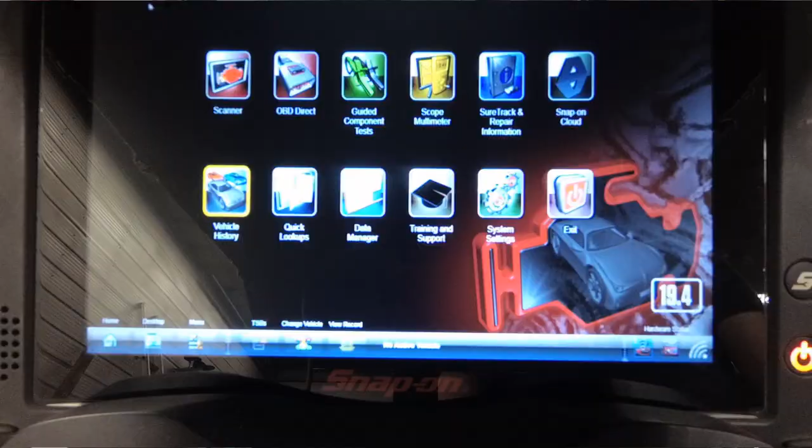So this is a new vehicle record. I've never scanned this before. Snap-on scanner automatically ID'd it already. And we'll start out with a network scan of the vehicle and see if there's any codes that will point us in a direction of some sort with regards to this backup camera. I'm not sure how long this network scan is going to take. There's the progress bar. That's fairly quick. Probably about 60 seconds. I'll pick up when we're at the end.

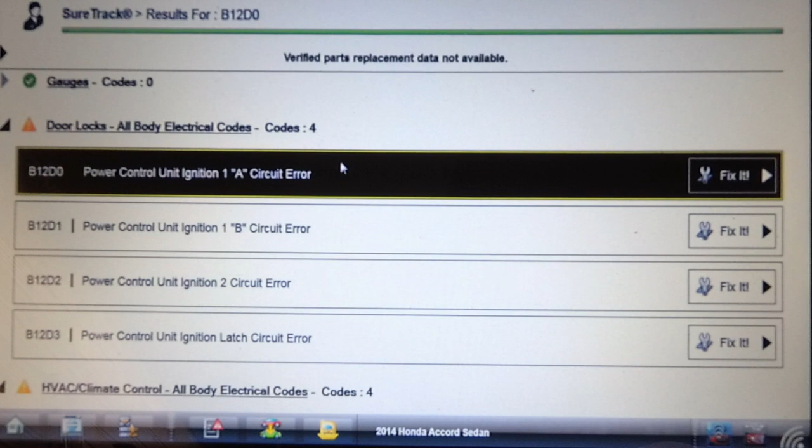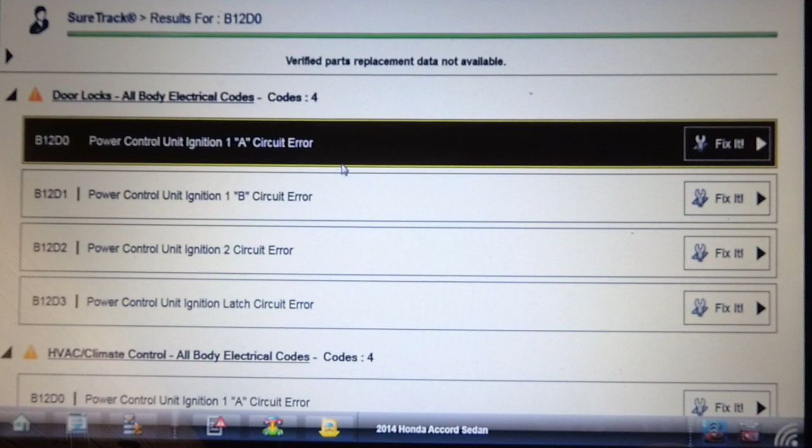So, it took about a minute and a half, almost 2 minutes to scan 20 controllers. And for the most part we don't have any codes except for these codes in the door lock system in the body, and I don't think they have anything to do with this backup camera. I'm not sure what those codes are generated by. It's interesting, they're in the body and they're in the HVAC. Probably all the same control codes.

Yeah. I'm going to try clearing all these codes out and see if that restores the operation again. Looks like this is divided up in several body controllers, but it's all the same controller. So I've got an electronic record of this already, so I'm going to just go in and clear all codes read by code scan and just see if that returns the operation of the backup camera. I would highly doubt it, but you never know. This seems fairly slow. Well, I'll pick up when we get to the end of this.

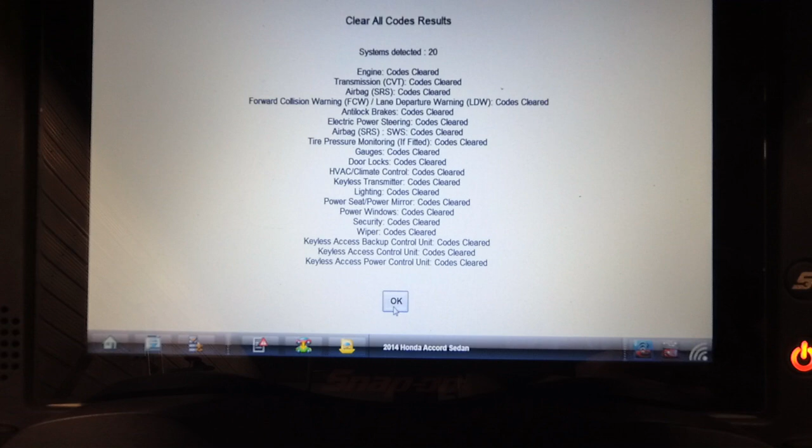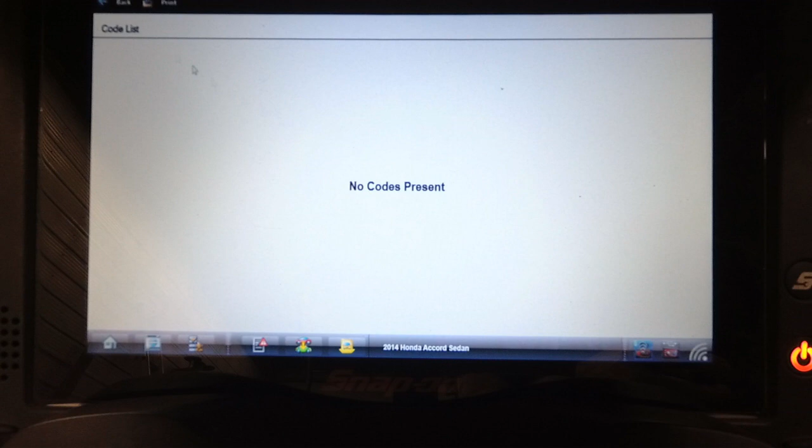So that took a couple minutes to actually go through a network code clear. And we're going to go and see if this has restored the operation of the camera. I just want to go into the door lock system and see if the codes had come back at all. All body electrical codes. Let's try that. So they haven't come back. So let's go and see if there's any change to the operation of the backup camera.

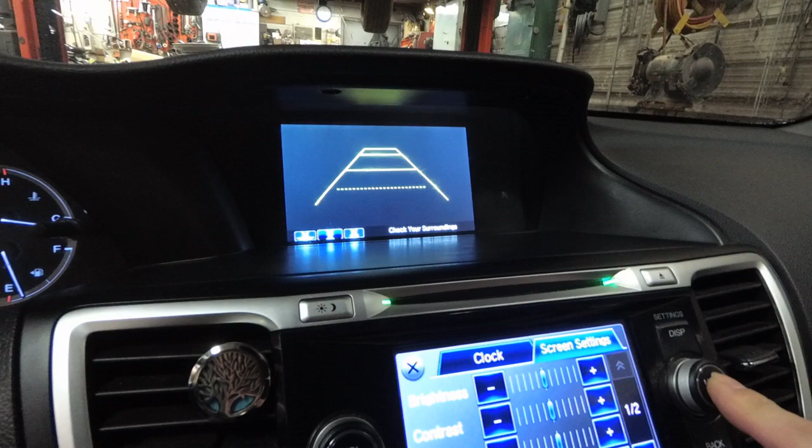I wonder where you hit OK. Oh, I guess you don't have to. Well, that didn't make any difference. I wonder why it says change view. Check your surroundings. Okay, so that didn't seem to make any difference. So those codes are secondary. We'll see if there's any TSBs on this. So it appears when the camera is up, you can use this menu button here to change the view. You can brighten it by turning this up and down, and you can change different camera views. That'd be nice once it works. So again, we're going to check for TSBs and see if there's anything.

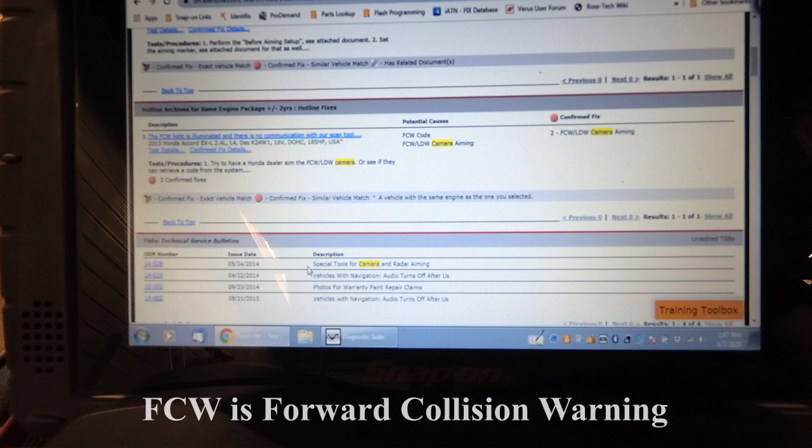So I'm on Identifix and I'm looking for technical service bulletins and case histories, and other than a lane watch camera and forward FCW, I'm not sure what camera that is, lane departure warning camera, that's not what we're working on. We're working on the rear view camera. No TSBs specifically related to this. Special tools for camera, vehicles with nav, audio turns off. I did find a picture of the camera and the connector view.

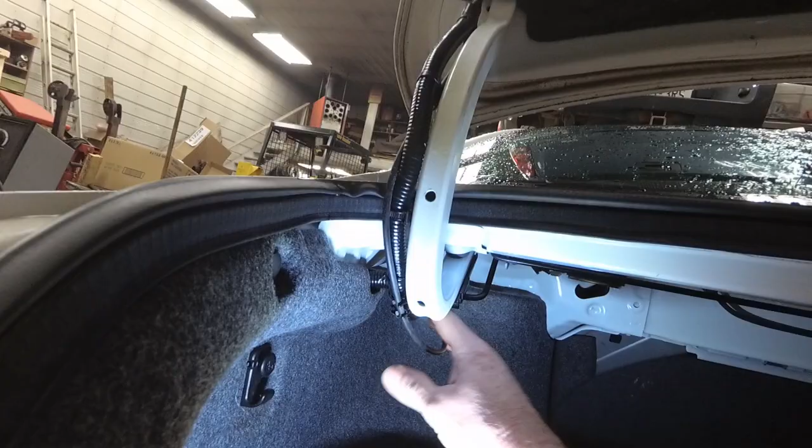Let's have a look at where this camera is on this vehicle. So here's the camera located just above the license plate, and I just noticed the license plate sticker has expired. They probably didn't realize that. One thing that makes me worried here is the fact that because it's on the trunk lid, every time you open and close the trunk, this wiring harness here has to bend. And if I look carefully here, it looks like somebody's been in here and taped up this wiring harness. So I wonder if there's some compromised wires. Any harness that flexes every time you open and close a door or trunk or hatch is always highly suspicious. So we'll look at that area and see if there's anything wrong in there.

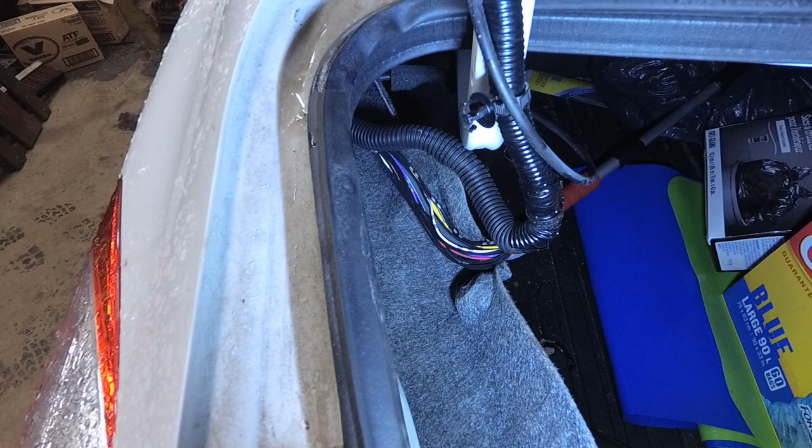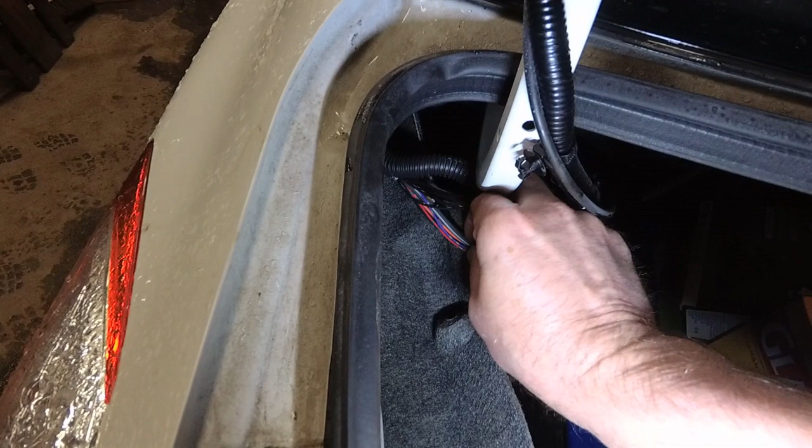So, no joy. I opened the harness. There is a tremendous amount of wires in here, but I found no broken wires where the harness had been taped up. I suspect that the dealership techs were thinking the same thing I was, being as how this is intermittent. There is one cable in here that I think is the video cable. It's quite large. I'm going to turn the key on, put this thing in reverse, and wiggle the wires back here and see if I notice anything happening on the dash. So I've got the key on, engine not running obviously. Gear shift in reverse. I'm going to go move the wiring back there and see if that camera comes on.

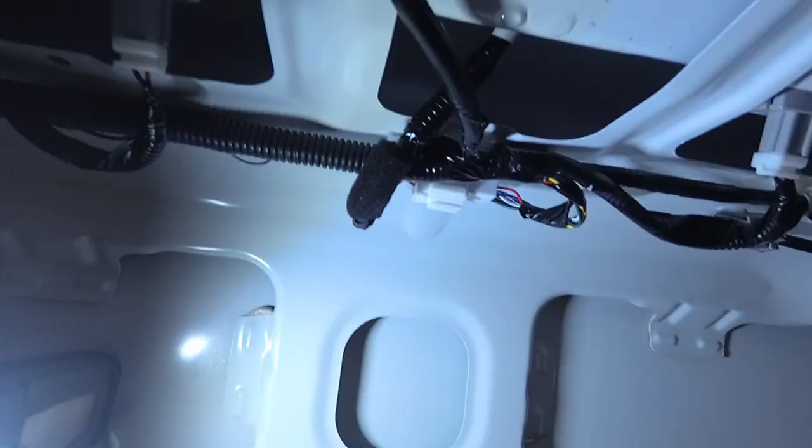Well, that seemed to make no difference. I tried tapping on the camera and that didn't work. So we're going to find that connector at the camera and test some wiring into the camera itself. So here's the connector behind the hush panel on the inside of the trunk lid that goes to the camera, and the camera is right up in here.

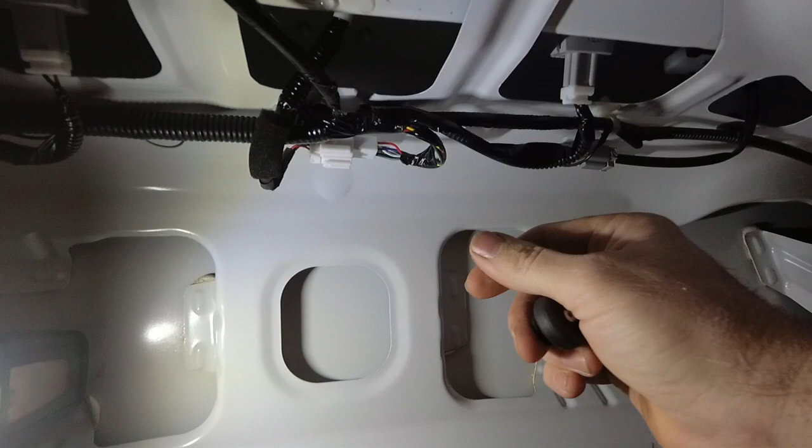Everything looks clean and tight there. I wiggled those connections. That's a picture of the connector and the pinouts. There's 8 wires to what appears to be that camera. Why so many wires, I don't know, but we'll figure it out. So we'll do some tests on this connector.

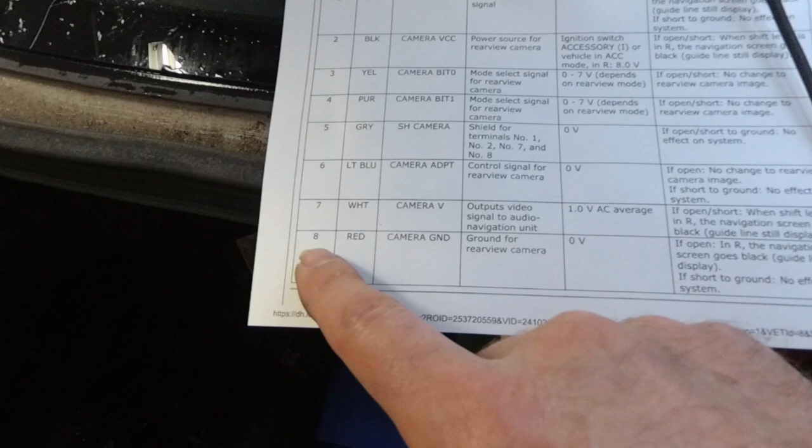So I performed all these electrical measurements here, and the only one that reads wrong from what I can see is pin 8, which is red, interestingly, is supposed to be ground for the rear view camera. And it says if that's open, the navigation screen goes black and the guidelines still display, which is what I have. Now when I measure the voltage on that red wire, which is this one up in here, I got

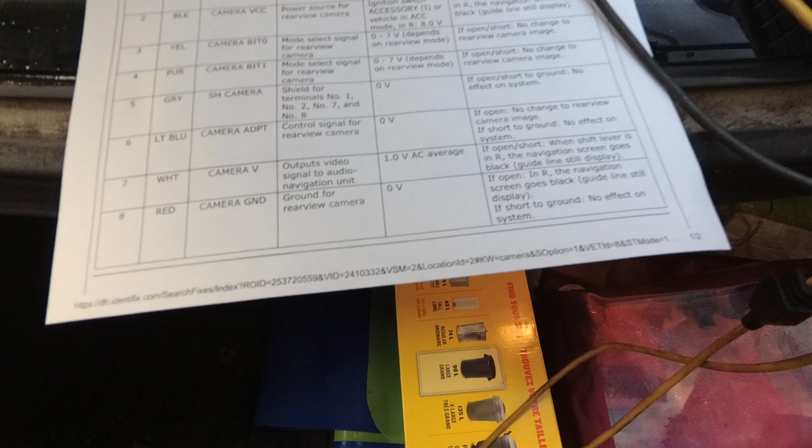system voltage. Let me try it again. Just going to set this down for a second. Well, I don't actually have system voltage. I have about 8 volts, 7.8 volts on that red wire, which according to this is supposed to be 0. Oh, do I take a chance and just ground it and see if that fixes the problem? Because that appears to be an open in the ground.

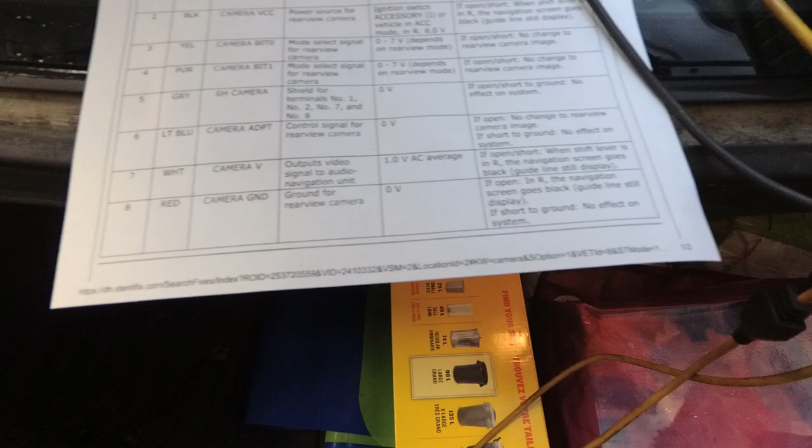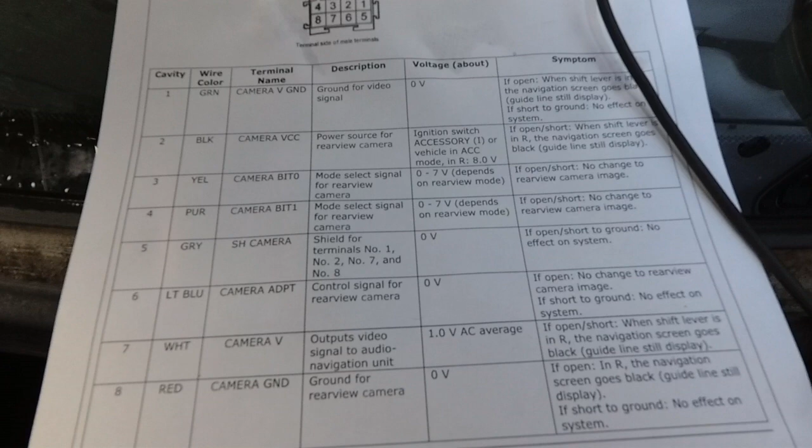It's funny that they use a red wire for a ground, and the black wire up here is power source for the rear view camera. Ignition switch 1, accessory and run. Let's check that one too. So here's a Mitchell version of this rear view camera, showing 1, 2, 3, 4, 5, 6, 7, 8 wires to it.

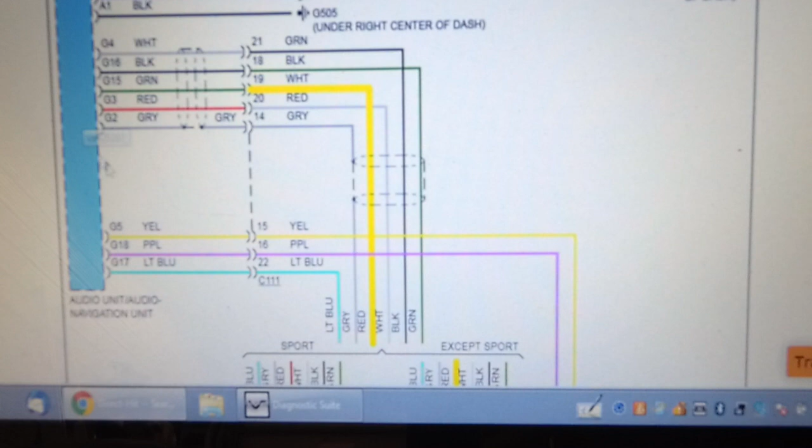The red wire, which is this one, on the Honda information says it's a ground, but yet all 8 of these wires go to the nav radio unit. None of them are identified on the schematic as to what they actually do. I'm afraid to just apply a ground on this wire because that could damage the nav unit if it isn't already defective.

The other odd thing is the black wire, this one here, shows it going back to the nav unit as well. In the Honda information it says it's ignition accessory or power for the unit. I've only got 8 volts there, 7.9 volts, which is odd. I'm going to see if I can find an OEM diagram.

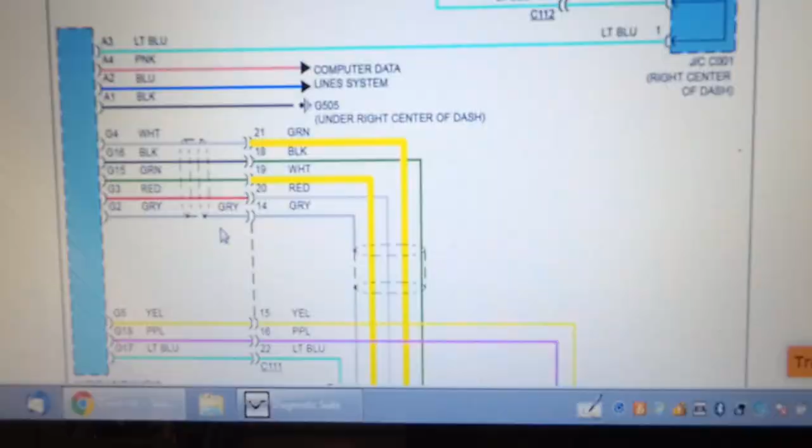There, so how's that for a schematic? Let's try blowing it up and see if that helps. Not helping. Oh, there we go. Wow. So I think the camera is way over at this end of the diagram. Rear view camera. So this is the nav unit, and it shows all 8 wires going to the nav unit. None of them are labeled on this schematic.

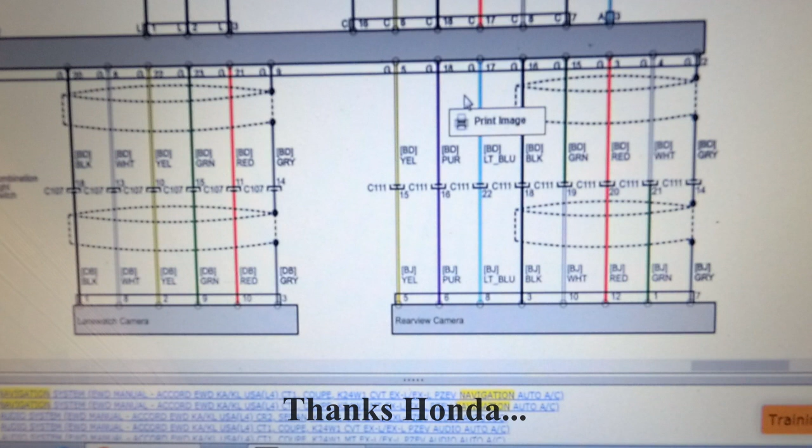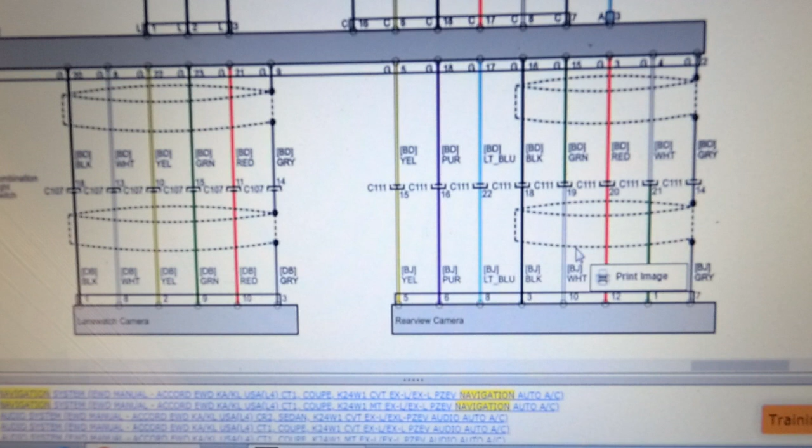Let's check a pinout of the nav unit and see if we can correlate with the terminology. Yeah, this black wire is not labeled here. The odd thing is I have like 7.9 volts on several of these wires, yet it does say on that testing pinout that I should have 7 volts depending on what mode it was in. Confusing. So at this connector, this particular red wire and green wire do not show up down here.

Remember this larger cable, which I figured might be a video cable? Well, it turns out it looks like 6 of the wires run inside that cable. So if it's broken internally, which it very well could be in here, that could cause the issue. I got no way of qualifying whether there's a break inside this wire. It doesn't feel suspicious, but man,

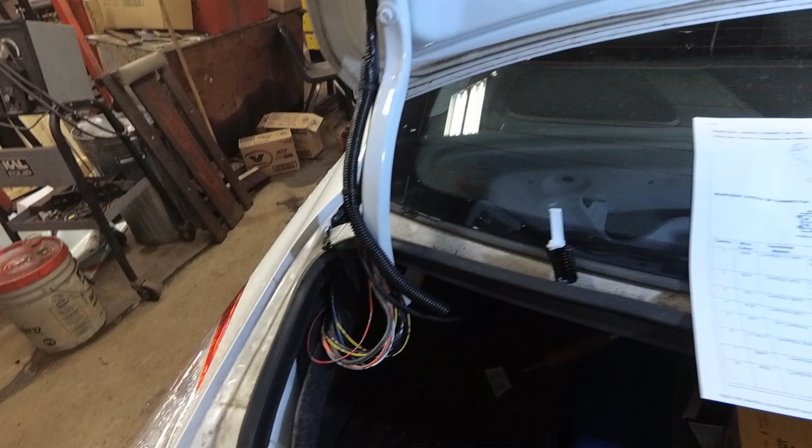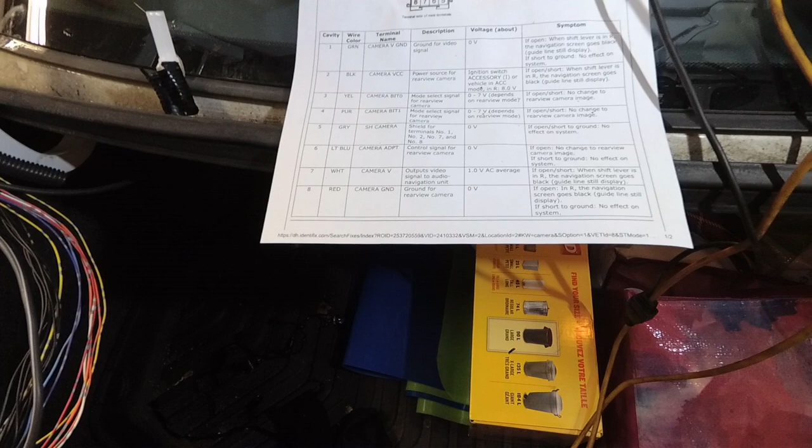according to the schematic, this red wire is supposed to be ground and I have 7.9 volts on it. This black wire is supposed to be ignition and I have 7.9 volts on it. So it's kind of acting like a bunch of wires are shorted together or open. Well, I guess the only way to qualify these wires is to remove the nav radio and check the circuits from the nav radio back here for continuity.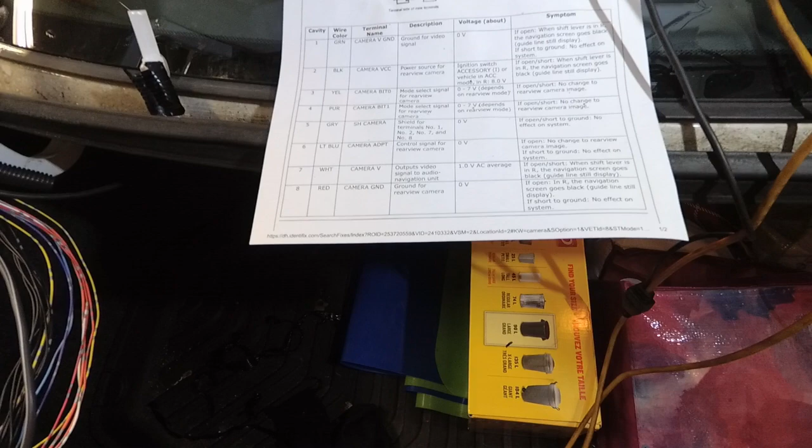The only wire that tests bad is this one here. It says it should be 0 volts, and it says if it is open, the nav will go black, but the guidelines will still display, which is exactly the symptom we have. I have 7.9 or 7.8 volts on that wire right now. I tried grounding it. It made no difference in the display operation.

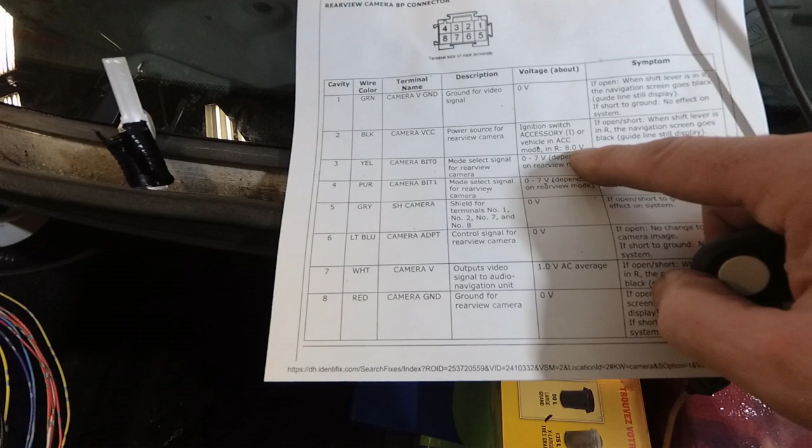The black wire, it says ignition switch accessory, but it also says 8 volts and I have 7.9 volts on it, so I'm saying that that's okay. The other ones are mode switches, because this camera has 3 modes of operation. It's like wide angle, normal, and I don't know, 3 views. The shield is 0, and the camera control signal for rear view camera is 0.

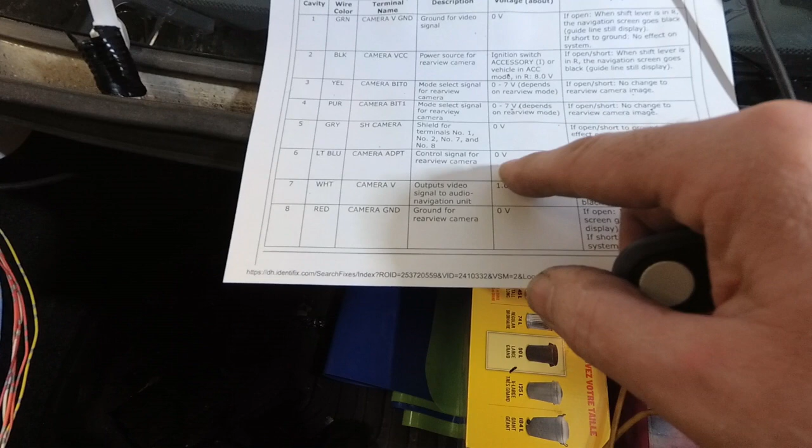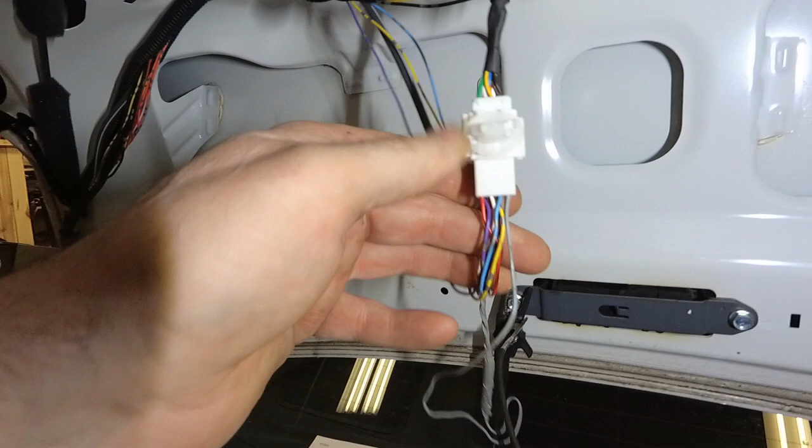Let's check that one, that blue wire, light blue wire. Okay, I just noticed something here. I'm looking at this side of the harness and the wire is red on this corner, but on this side of the harness it's green. Thanks, Honda. The white wire is white, the yellow is blue. Why would you change frickin' colors?

So we need to check. I'm not sure if these wire colors pertain to the actual pins on the connector or the pins on the harness. Oh my goodness sakes, why would you change colors going through a connector?

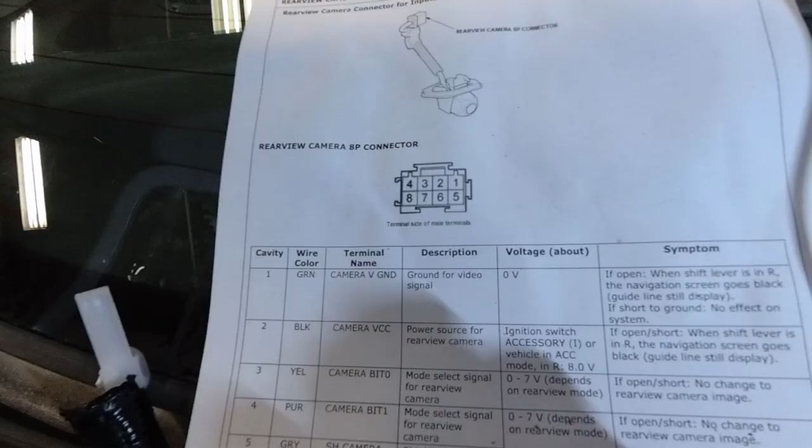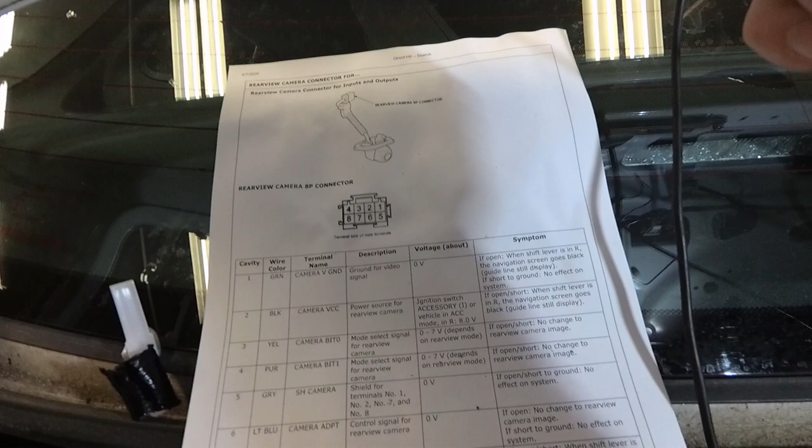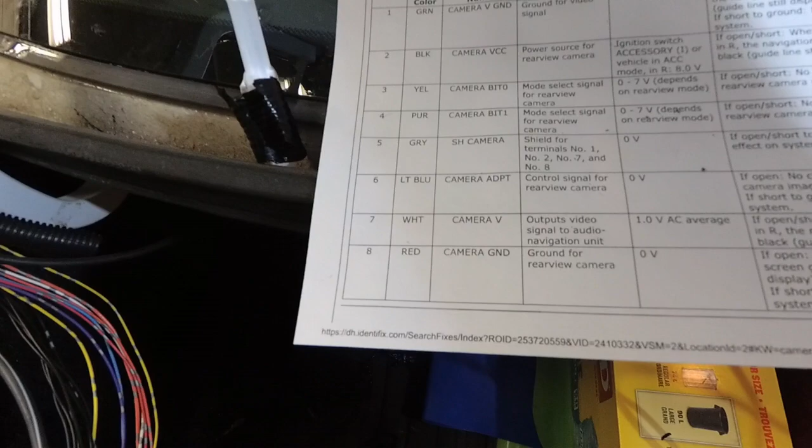So that is correct. This is the terminal side of male terminals, which is this side here, which is what I'm checking it on. They change color going into the actual camera, but the pin locations, pin number 8 is red, the one right next to it is white, the one right next to that, number 6, is light blue and then gray. So these are the harness side, not the camera side. So I'm still back to there's a problem with this wire.

It's got 7.9 volts on it, so we need to check continuity from the camera or from the nav radio itself. So in the electrical diagram, it shows a connector between the rear camera, the backup camera, and the nav radio, and it's an inline connector C111, and this is the general location. It's below the hood release or parking brake release, in that general area behind the left kick panel in the A pillar. So let's have a look.

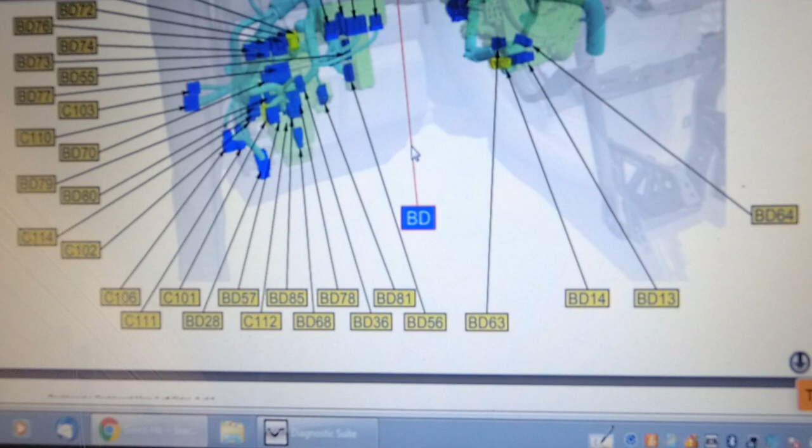I've got the pillar cover off and found that connector. So in this area here, you can see here's that molded harness coming from the trunk, and it goes into that connector right there. That's C111. I think there's 4 or 5 wires in here. 1, 2, 3, 4, 5 by the looks of it. Yeah, red, white, black, green, and gray. Gray is the shield. We're going to check the voltages here and then test continuity of this wire from this connector to the connector at the backup camera. See how that works out.

So I'm back pinning that red wire, which is supposed to be a ground, at this connector, and I've got 7.85 volts on here. The black wire has 8 volts, so I'm going to check continuity of these wires to the camera.

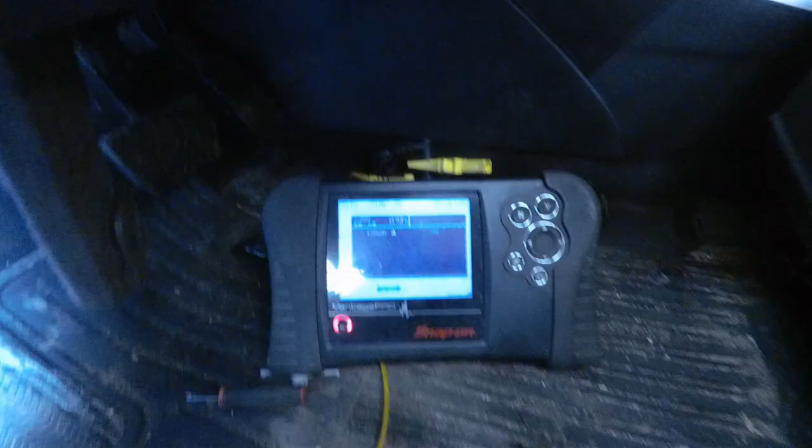So measuring resistance of the red wire from this connector C111 under the dash to the connector at the backup camera. Back pinning here, and I got a long jumper wire, shows 0.4 ohms. So we don't have a problem with those wires. I'm going to check the rest of them.

So I tested all 5 of the wires coming to this C111 connector for continuity to the trunk, to the backup camera connector, and they're all good. I also tested for a short between wires at 400,000 ohms resistance, and they all show infinite, so they're not shorted. But this red wire, which is supposed to be the backup camera ground, is showing 7.9 volts on it when it's plugged into the connector. So that's back pinning the camera ground wire on the red terminal at C111, and it shows 8 volts.

Let's put the camera on. Doesn't work now. The LaneWatch camera on the right side works fine. Put it in reverse. It's funny, I don't even get the bars on the radio now unless I don't have the key in the on position. The other camera was working. Now I've only got 2 volts on that wire.

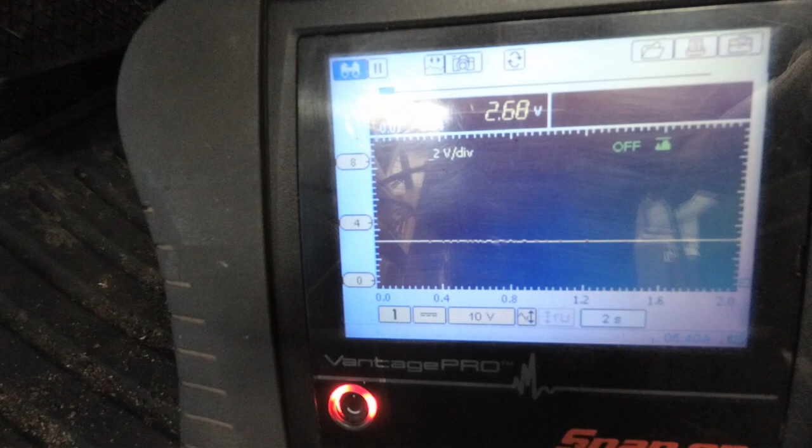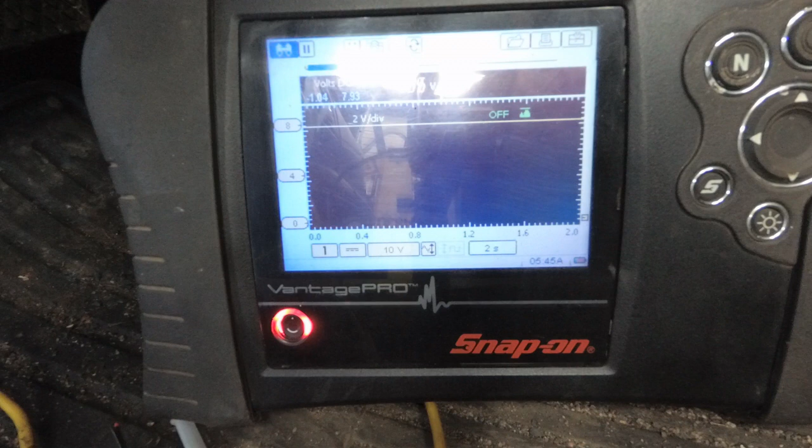Something strange going on. So there we go again with the camera displaying the lines, but a black screen. It shows 7.8 volts on that ground wire, or so-called ground wire. So I'm starting to lean towards a problem with the nav unit, but that seems awful unusual. The right side camera works fine when you put the signal light on, and it's the same type of circuit. I wonder if it runs through this connector. I doubt it does. I think it probably goes through the other side.

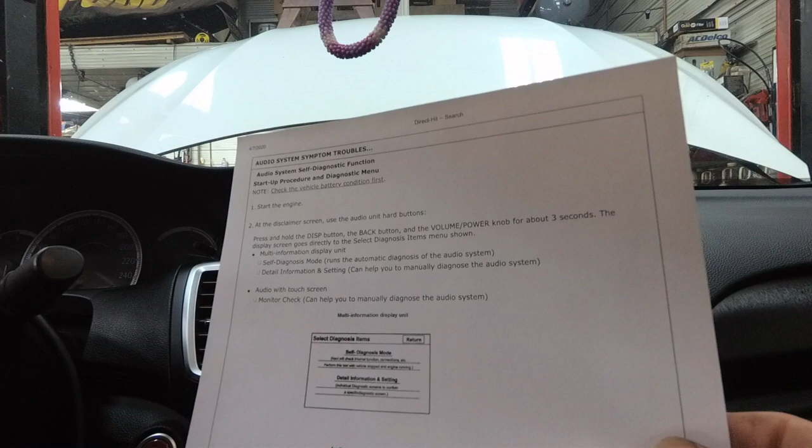So I found some information on there being a built-in diagnostic procedure for the display and radio and stuff. And you enter diagnostics by starting the vehicle, and when the display screen comes on, you press the volume power button, display button, and the back button simultaneously for 3 seconds, and it goes into diagnostics. So I'm going to give that a try.

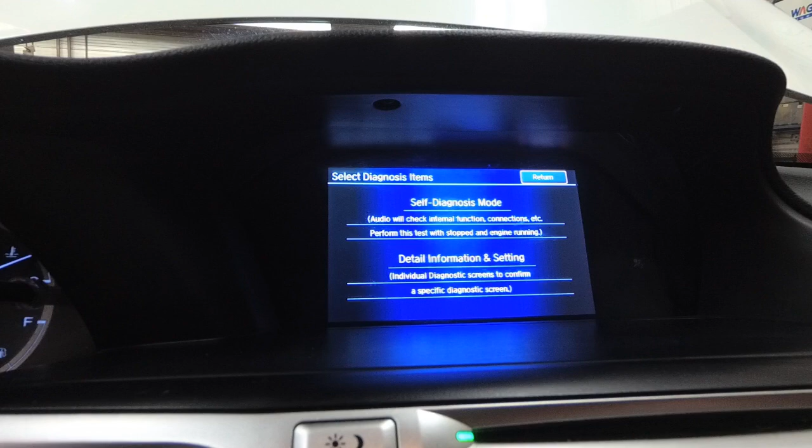Okay, get ready. So as soon as the splash screen comes up, press and hold all three buttons simultaneously, and then we get into that menu, self-diagnostic. So I'm going to try and get the camera a little closer here. So now use the menu select button to select self-diagnostic mode, and press the menu select button to run the test.

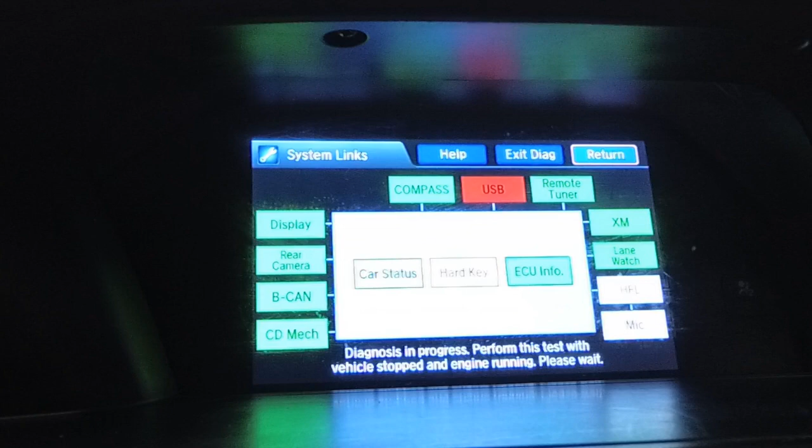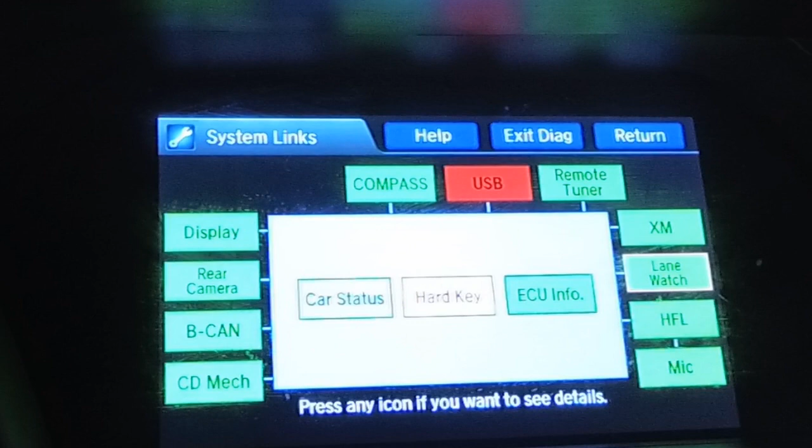Then we get into another sub-menu. Now I can use the menu knob to rotate through the different functions, and I'm going to go to the rear camera. Come on, you can do it.

Oh, there we go. Rear camera. Let's see what it says when we press yes. Camera connection is okay. Well, isn't that special? Press it again. Let's try the lane watch camera. Connection okay. Aiming okay. I'm not going to start. Press return.

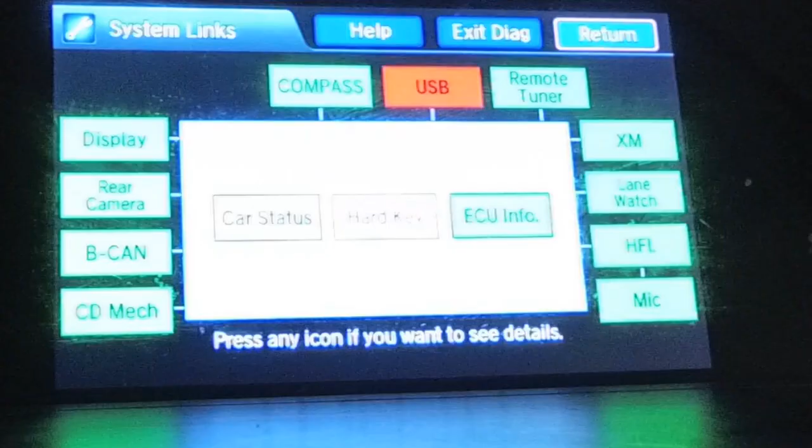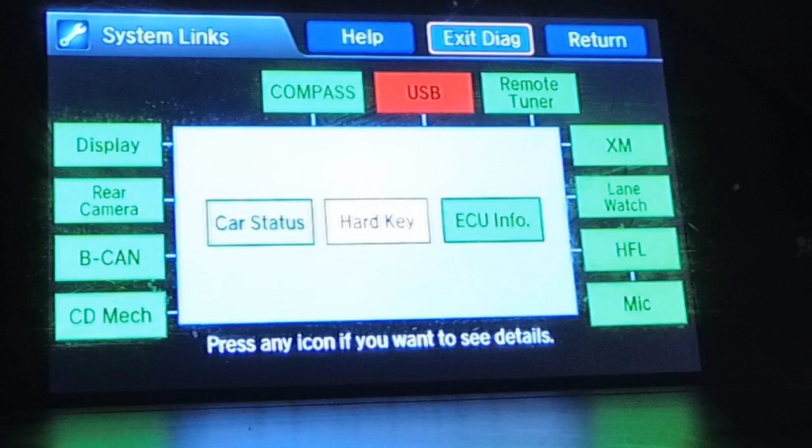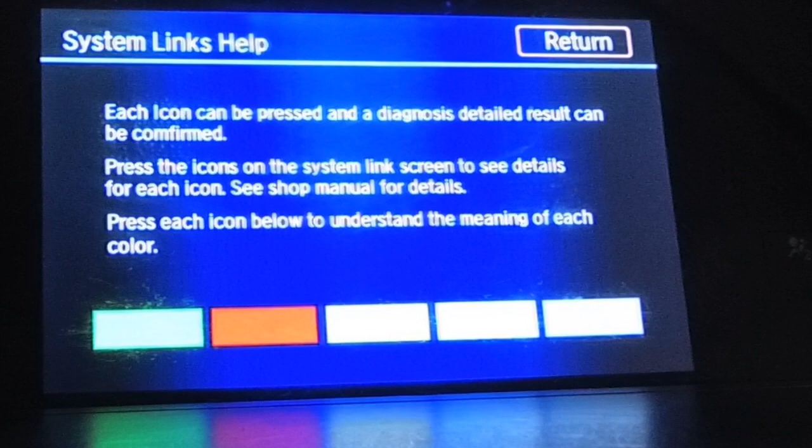So it thinks the camera is fine. What it says in help. Come on. Oh, you got to go around the other way. Each icon can be pressed and a diagnosis detailed result can be confirmed. Press the icons on the system link screen to see details for each icon. See shop manual for details. Well, that didn't help.

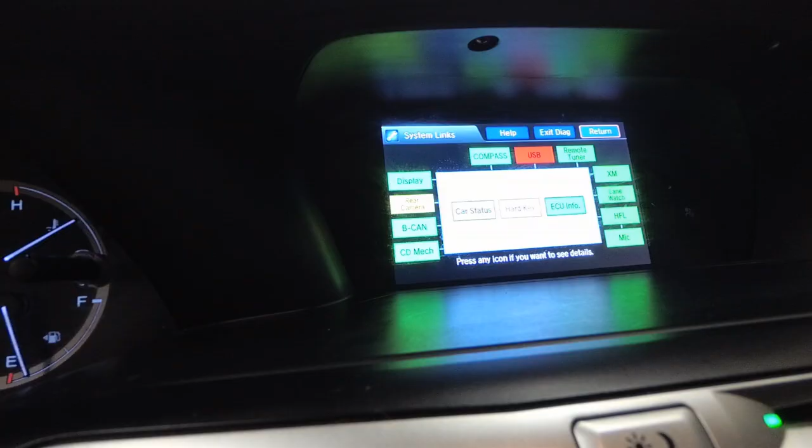Tried scanning it with another scan tool, and no fault codes in the radio display. Oh well, it was a nice thought. So I thought I'd unplug the rear camera. You notice that it's highlighted in yellow now. I got the rear camera disconnected. Let's see what it says about it. Connection NG. Might as well say NFG. Well, that's useful. Oh well.

So I've confirmed the wiring from the rear view camera connector right here to C111 under the left side A pillar, and the wiring is good. There's no opens, there's no shorts between circuits. But notice there are 5 wires in this conduit, and it's a shielded cable.

Now I look at the right side power mirror, and it has a camera in it as well, and it works when you put the right signal light on, provided you're not in reverse. That camera shows up on the display to indicate what's beside you in the right lane. Notice that the wiring is very similar, same color wires.

So what I propose to do here is to try to backwards engineer this circuit a little bit by looking at connector 107, which is under the right side of the dash, because you see C107 and C111 have the same color wires. I'm going to see if I can find a connector view for C107. We're going to test at this wire here, which supposedly would be the ground, and see if it is in fact grounded on the right side mirror that functions.

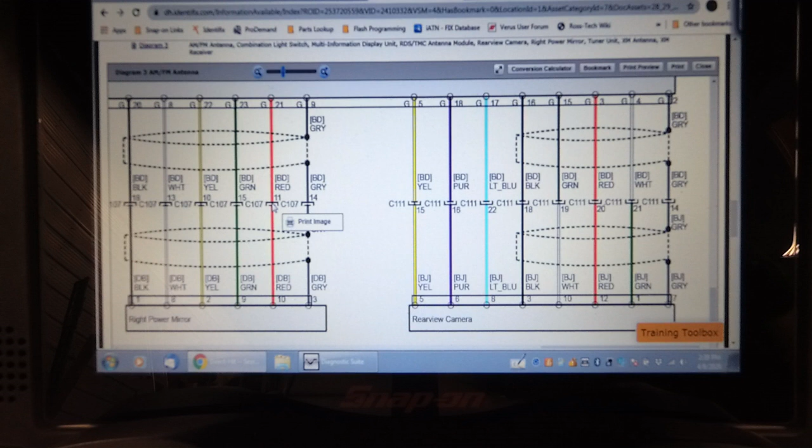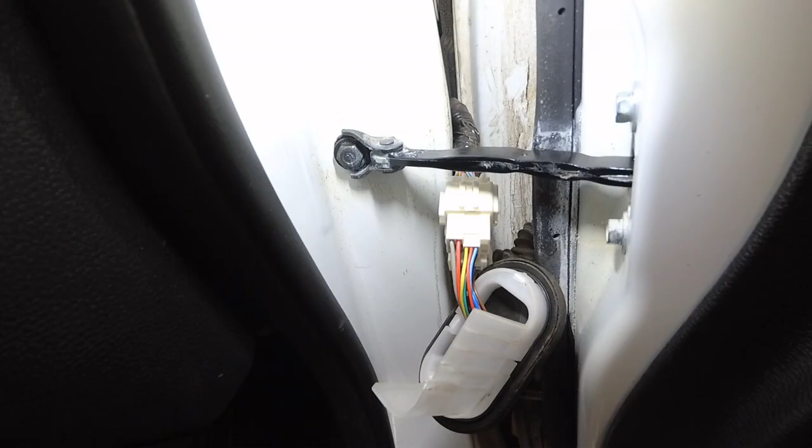So this is the best diagram I can find for C107. It appears to be the upper connector on the right side A pillar. You can access it from under the dash, so we're going to have a look at that. So I managed to get the connector pulled out through the door, and this, I believe, although it looks like an orange wire here, is the wire that should be the ground according to this.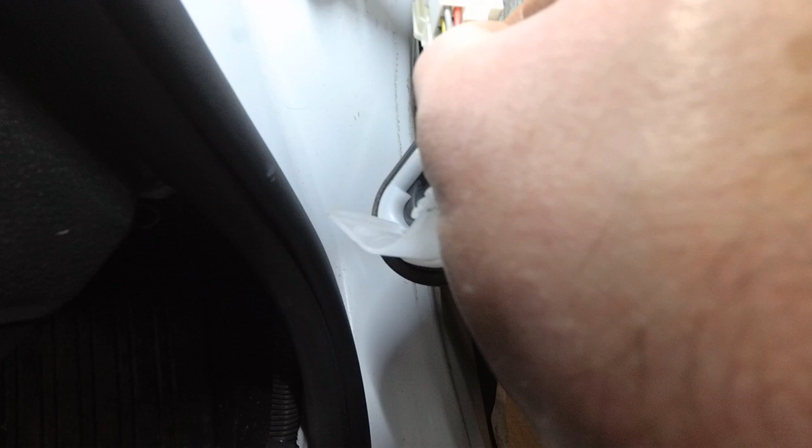I labeled these connector wires. There's yellow, red, 12 isn't used, and white is 13. So if you look here, you see yellow, red, and blue is not part of this circuit, and then white down there, followed by gray, and then green. So I think this wire here is the one that we need to check to see what's on that wire. So that's what we're going to set up to do.

So I'm back pinning that wire, which I believe is the same circuit as the backup camera, and believe it or not, I read 7.85 volts on that wire. Yet this black wire, which according to the schematic back there is supposed to be a ground, or is supposed to be power, is actually 0 on this side. So I wonder if that black wire is supposed to be a ground. It's unusual that they would use red wires for ground and black wires for power, but stranger things have happened.

So I think this camera on this mirror works exactly the same as the backup camera, except the backup camera has a couple of extra modes that it operates in, so it changes the focal point or something. What other wires were there? Well, I wonder if we have a bad ground on that. But it goes back to the control unit for the ground. It's not a dedicated ground.

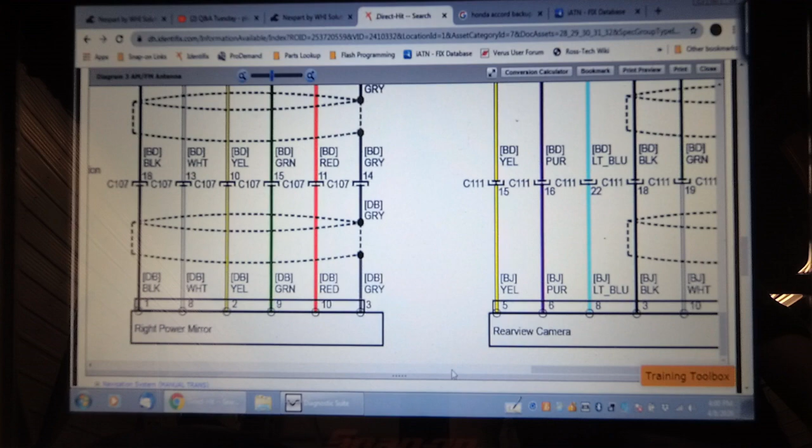So here's my thought process on this thing after all this time. Both the right camera for right lane departure or side view and the rear view camera seem to operate very similarly. The limited troubleshooting information that's available from Honda says that this red wire is supposed to be the camera ground. It just goes back to the audio control unit. As I said before, I've qualified all of these wires.

They're all good. So I thought I'd compare the right camera on the right side passenger mirror. This red wire has the same voltage on it as the red wire over here. It's not 0 like it says in that. All the rest of the circuits test the same. So I'm leaning towards the fact that the troubleshooting information is incorrect. Imagine that. There is no other troubleshooting chart.

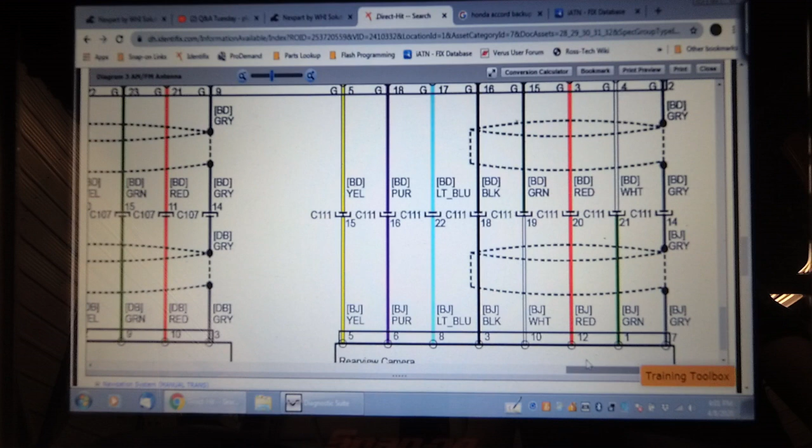It says built-in diagnostics in the radio and qualifying wires is basically it. And then if that doesn't work, change the camera. If that doesn't work, change the audio control head. So I'm going to try and source a previously enjoyed rear view camera. See if anybody at the wrecking yards has one, because that's easy enough to just plug in and try.

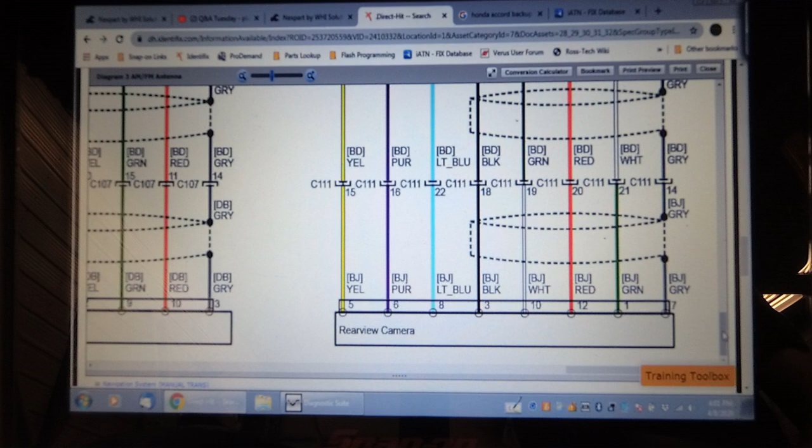I would have already tried that, but given the current COVID situation, most of the recycling yards are on lockdown. So we'll see what happens in the future. I'm going to try and find one of these cameras. I'm also going to see if I have a customer with a similar vehicle, because it's only going to take a couple minutes to compare a known good vehicle to this one if I could find another vehicle like this.

So that's it for now. Sorry, I wish I had a more positive ending to this. Maybe there'll be a part 2.

So we're back working on this 2014 Honda Accord sedan with the backup camera problem. Customer has ordered a new backup camera from Dorman. That's the part number, 590-440. And we're going to put it in this morning, and hopefully it's going to fix the problem. There was some controversy about the factory test procedures being very vague, so let's hope this fixes it.

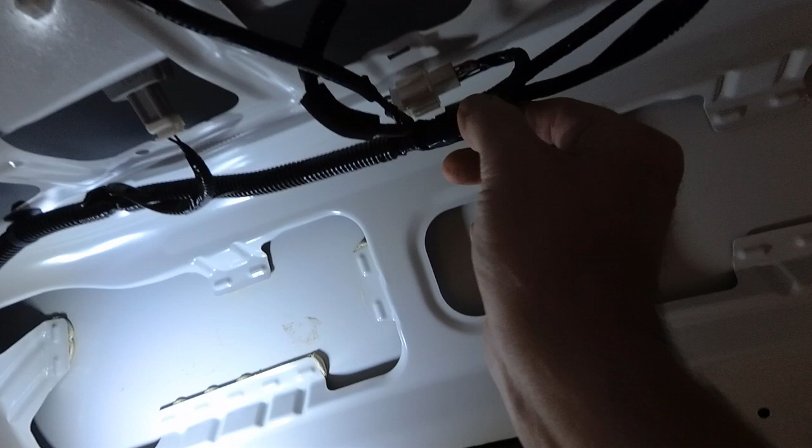So remove all the plastic push pins that hold the inner trunk lid cover on to access the connector up here. Here's the connector and the wiring harness running through to the camera itself. This is the camera. So we'll get that unplugged and plug in the new part. So I've got the new camera just plugged in. I haven't mounted it yet, and I've got the vehicle running.

So the moment of truth, we put it in reverse. And we have a picture from the camera. It's a beautiful thing. So now all we got to do is mount it.

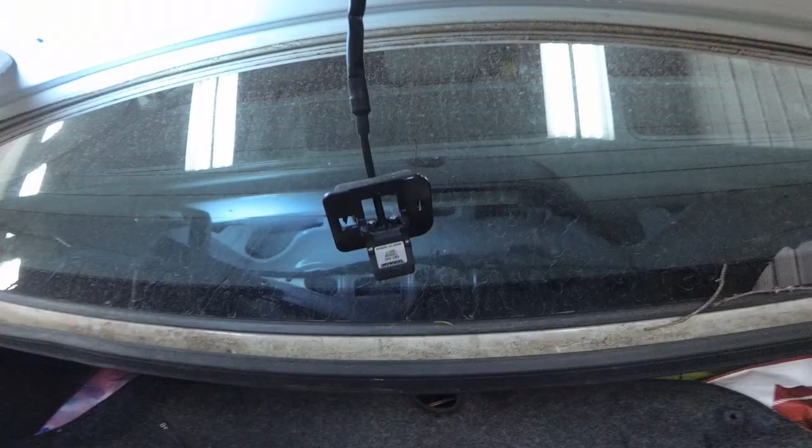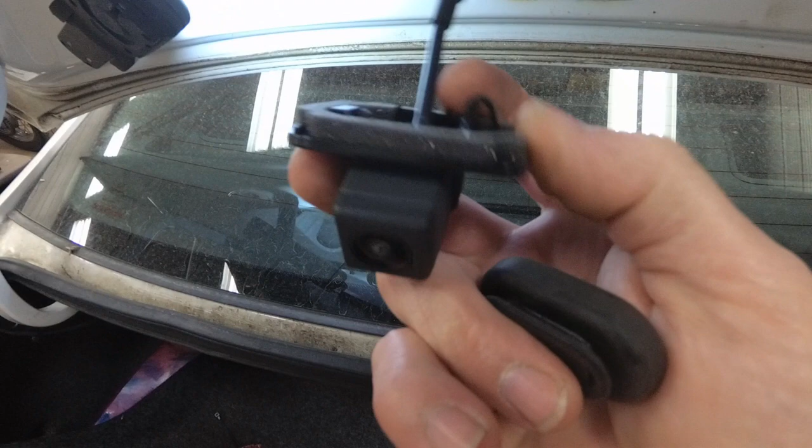So as I said, I just plugged the camera in. As you can see here, it's not mounted properly. But the way this thing mounts in there is there's a little retaining clip on the passenger side, right-hand side of the camera that has to be depressed, and the camera will just pop in like this and snap in place. So let's go ahead and install it in its location.

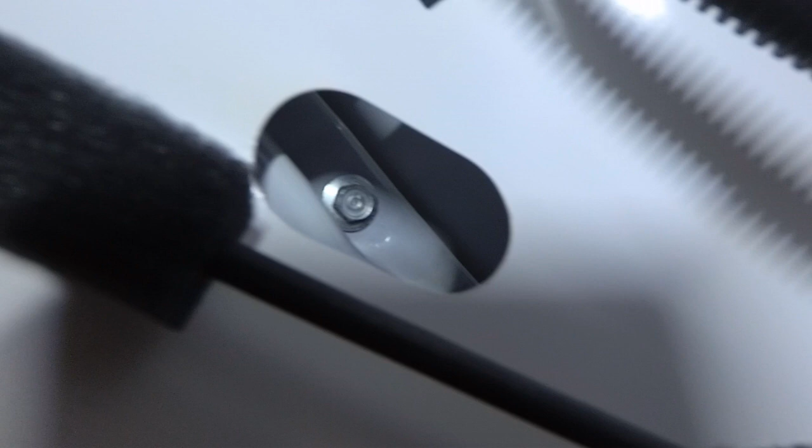So to remove this camera that's in here, it's necessary to remove this chrome strip. So over on this side, through the back of the trunk, is a 6mm bolt with a 10mm head. One here and one here. Simply up through this hole here, I don't know if you're going to be able to see it there, you can see that 6mm, 10mm headed bolt. Remove those 2 bolts.

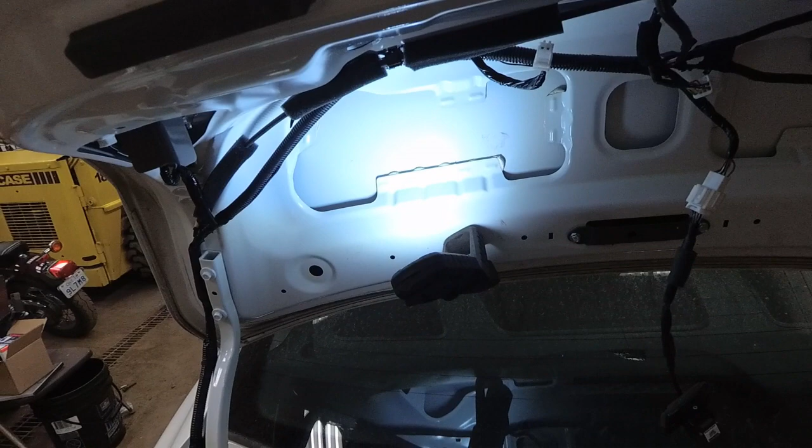Now, problem. The bolts are turning, the nut in the chrome is broken loose, and I can't get either of those 2 bolts out. They're probably rusted from the backside, and so the clip is turning in the plastic trim, and those bolts need to be removed to get it out. So I'm going to try and, I don't know, pry out on it as I thread it. I might have to drill the end of the bolt off to get that trim off. That trim has to come off in order to get this camera out. A 5-minute job turned ugly.

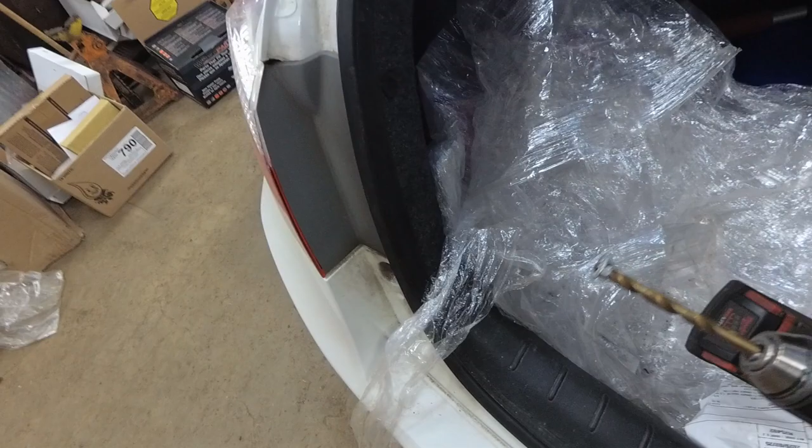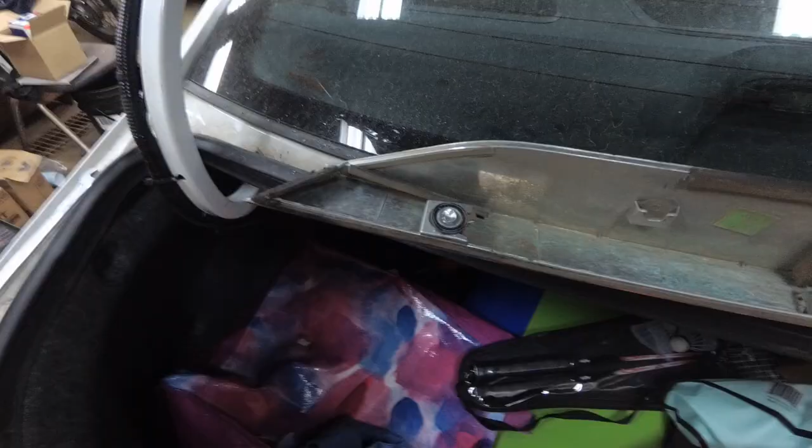So there's what I had to do. I had to drill the head of the bolt off from the bottom using a 1/8 drill bit and then a 5/16 drill bit. And I got the other side to do now, but I got this side, the left side, drilled out. Hopefully we can repair the mount once we get the trim off. So there's the plastic nut spinning free inside the plastic. There's clips here that hold it on, but those bolts need to be removed first in order to pry this thing out. Now we got the trim off, now we can take the camera out.

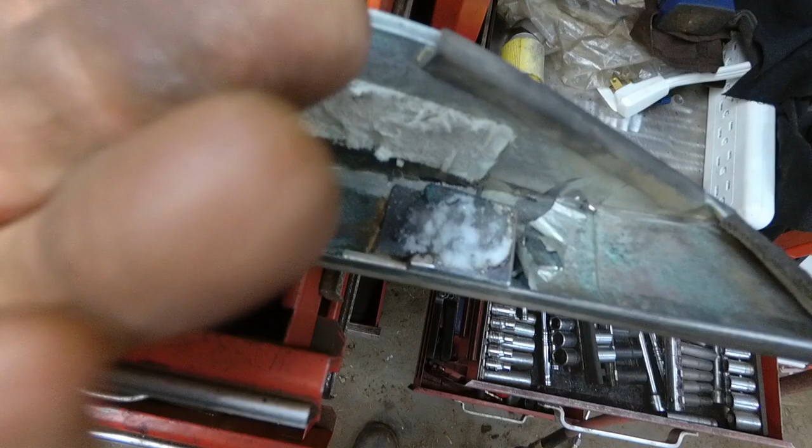So here's what I did. I took the plastic nuts. You can see why they broke. They're all rusted from the backside, so as soon as you start to turn the bolt, the whole plastic piece just turns inside the plastic trim. So I've taken them right out because I can't put anything in there, it's broken. And I've glued in a piece of plastic on either end with that rapid fix or instant fix. There's a 2-part liquid and filler.

And what I'm going to do is snap the trim back into place and then drill up through it and put a self-tapping screw, just a small sheet metal screw, because it doesn't really need to do much, because these clips here will hold it in place, these 2 and these clips here. So that should be good to go. We'll see. So I set it in place and marked it, and this is what I'm going to use to hold it in from the bottom. These pan head screws will thread into the plastic that I've drilled here, and they'll likely come out if I ever have to come out again.

So there's the screws back installed. I don't know if you can see it from that angle, but they threaded in there nice and tight. So I'm sure it won't come off. Just clean up the filings here and we're good to go. So let's back this thing out of the shop.

Oh, that's a beautiful thing. After all that inaccurate service diagnostic information. Well, camera seems to work just fine. Let's not back into anything.